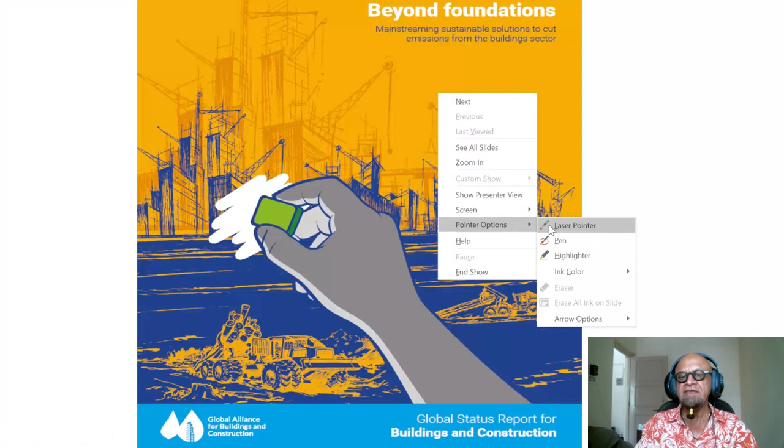Buildings and construction are among the major sectors as far as contributing to total emissions are concerned. So here are a few ideas. This is from the Global Status Report for Buildings and Construction, by the Global Alliance for Buildings and Construction: Beyond foundations, mainstreaming sustainable solutions to cut emissions from the buildings sector.

Obviously a good idea, and you have to take the ideas from wherever they come from. Just because they are profit-making companies doesn't mean they cannot put out good ideas on what they want to do to make themselves more sustainable, because everybody now has a motivation to at least appear to be environmentally friendly and sustainable. And of course there are green certification programs and so on.

The executive summary is that the buildings and construction sector contributes significantly to global climate change, accounting for about 21% of global greenhouse gas emissions. In 2022, buildings were responsible for 34% of global energy demand and 37% of energy and process-related carbon dioxide emissions. This is only expected to keep growing by 2050, as we'll see in a minute.

So policy progress is evident with more comprehensive climate action plans covering buildings and construction in nationally determined contributions. If you don't know what they are, you can follow up elsewhere. Countries that signed on to the Paris Agreement committed to contributing to global mitigation through these nationally determined contributions. However, few align with net zero operational emissions, and while over 81 countries have building energy codes, many are outdated.

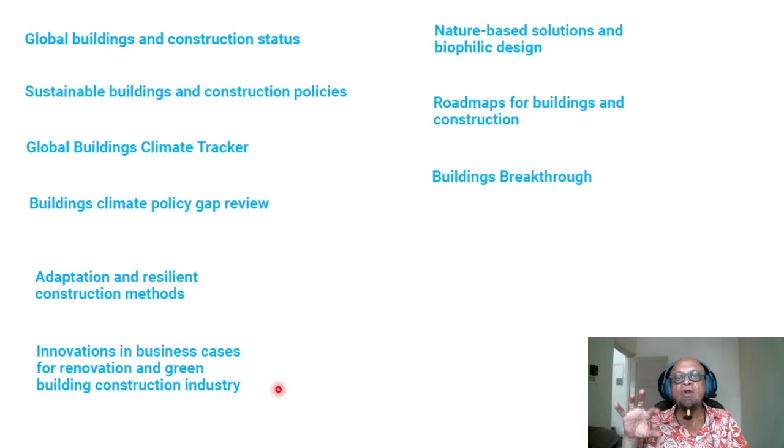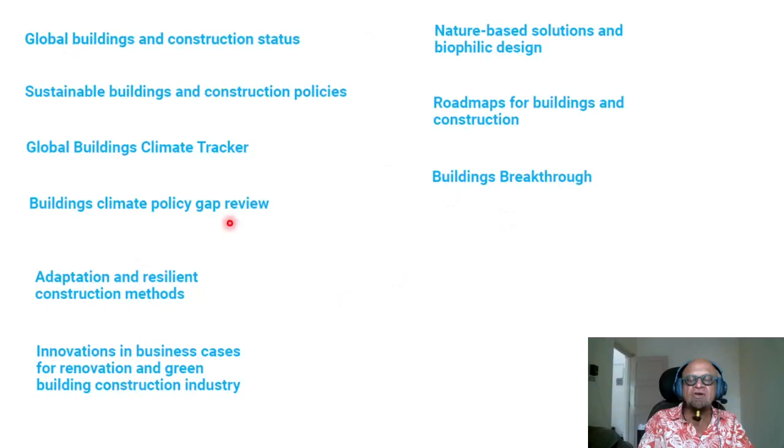Obviously, old buildings have to be retrofitted to make them more environmentally friendly, reduce their emissions, take them towards sustainability and so on. Nature-based solutions and biophilic designs are also in play, roadmaps for buildings and construction, and buildings breakthrough. I'm reading off the subsection titles because it's a long report. I'm not going to read all of it, but I'll show some key highlights.

So these are the share of buildings in total final energy consumption in 2022 and share of buildings in global energy consumption and process emissions as well. So energy demand by sector: 66% comes from other, 21% from residential, 9% from non-residential, 4% from buildings construction industry.

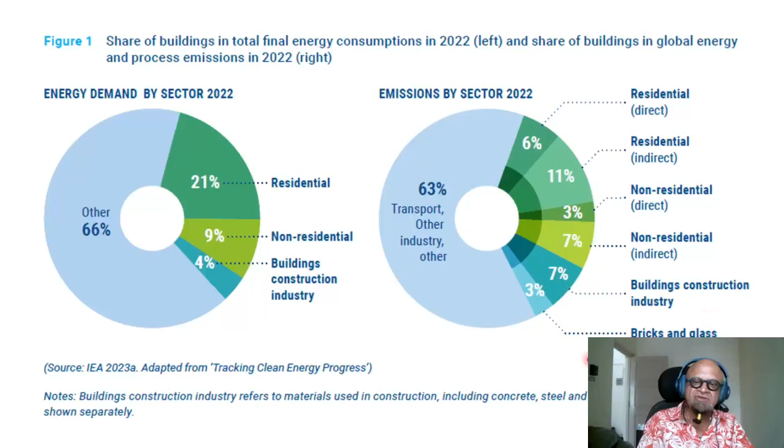And in terms of emissions by sector, if you look at transport and other industry, that's 63%. Then you have residential, direct and indirect, non-residential, direct and indirect, buildings construction, and bricks and glass. So it gives you some idea of where the levers may be in terms of reducing emissions.

The Global Buildings Climate Tracker Decarbonization Index looks at where we are and where we are headed. So on the decarbonization index, we are somewhere here, and it needs to head this way by 2050. The path to the goal is up here in terms of hitting 100% net zero for the building sector, and the gap here is 39.8 points. So they have an index that defines all these things.

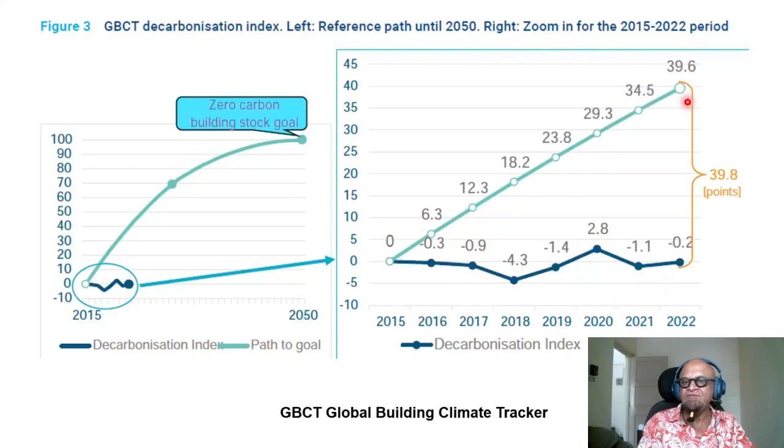I'm not going to go into that, but you can see that there is a fairly substantial gap between where we are in the last few years and where we need to be if we want to hit the goals by 2030 and 2050. So the GBCT's indicator weights, it's just something they do, and they look at 63% here for total CO2 emissions, and building sector energy intensity, renewable share in final energy demand, and so on and so forth.

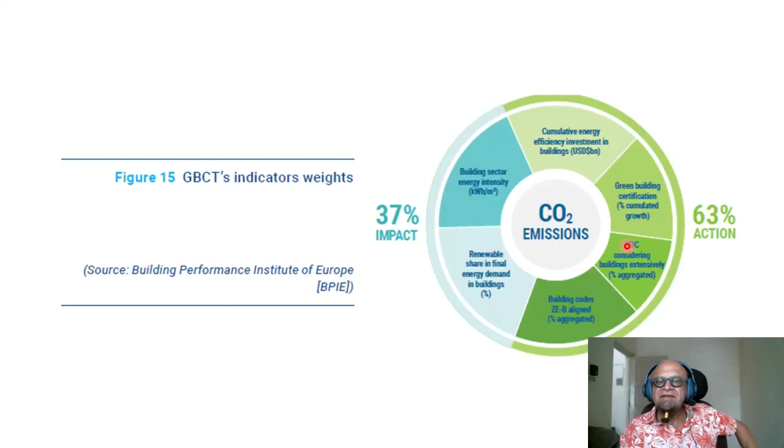You get the idea that GBCT is tracking net zero and where we are. So let's jump to recommendations for policy and decision makers. Again, not reading the whole thing, but the 2024 Global Status Report for Buildings and Construction indicates a significant lag in the sector's progress towards the Paris Agreement's net zero carbon targets by 2050. To address this, the report provides targeted recommendations. So that is split into for governments, private sector, researchers, and how these steps can help.

So for governments, the urgent need is to develop and enforce climate action roadmaps for buildings and construction, with 161 nations still pending. Private sector actors are encouraged to integrate climate action roadmaps, channel investments into energy efficient and net zero carbon buildings, and undertake retrofits to lower emissions, of course, right? How all these things will be incentivized is still tricky.

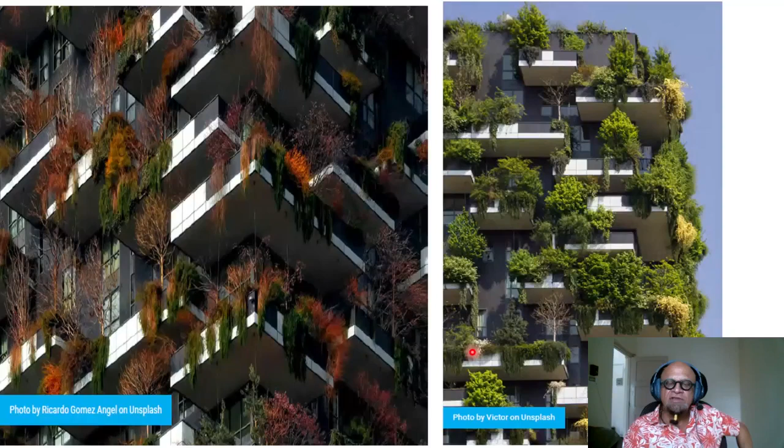Researchers and NGOs play a crucial role in supporting the creation of climate action roadmaps with evidence-based research. These steps are critical for realigning the buildings and construction sector with the global climate goals, ensuring a sustainable and resilient future. Okay, that's a good kind of a broad guideline for policies, but details will be region specific, local specific, climate specific as well.

So some nice images of the efforts at individual building levels on reducing energy use, improving air quality, and taking out CO2 with vegetation. So you can think of rooftop gardens, but also gardens literally on each balcony, and there is a lot of literature on how these are beneficial and so on.

They also do social impact assessments in this report. I'm not going to go into the details, but obviously we have Scope 0, Scope 1, Scope 2, and Scope 3 that we look at, entity and internal practices of the particular part of the sector. So here examples include ethical leadership, employee health, working conditions and satisfaction, stakeholder engagement, corporate governance, so overlapping with the ESG or the environmental, social and governance reporting that is needed.

Building users and sites under Scope 1 with housing attainability, habitability, indoor environmental. So this is social impact work, not emissions. Sorry about that. Climate change impacts and adaptation measures, and of course here you have community and surroundings, supply and value chains, and you have social impact issues and considerations across all scopes. Okay, so these also include diversity and inclusion, health, comfort and safety, privacy and security, and climate impacts.

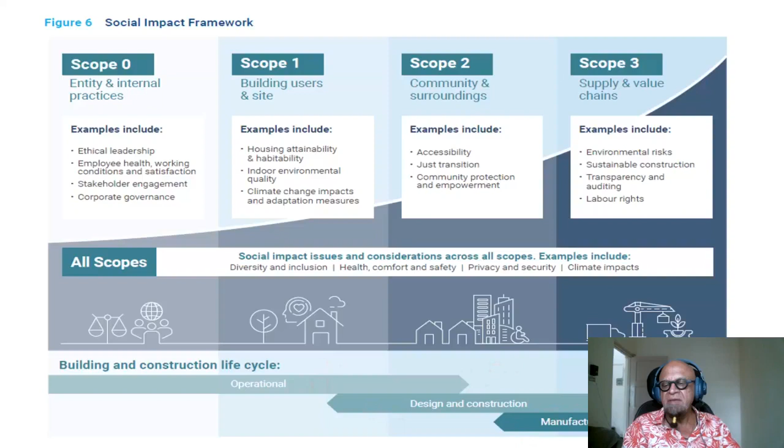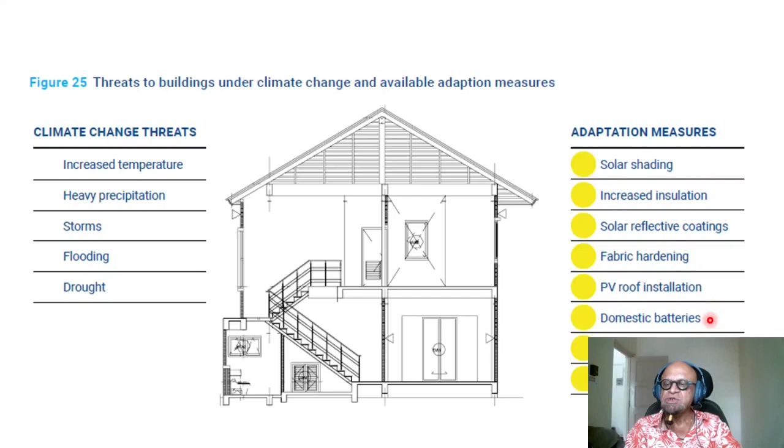Threats to buildings under climate change and available adaptation measures. Of course, you have chronic stressors like increasing temperatures and heavy precipitation, but you have acute stressors like storms, floodings and droughts. And adaptation measures, of course, include renewable energy and solar shading, increased insulation, solar reflective coating, fabric hardening, PV roof installation, domestic batteries, green facades, rain water tanks, and so on.

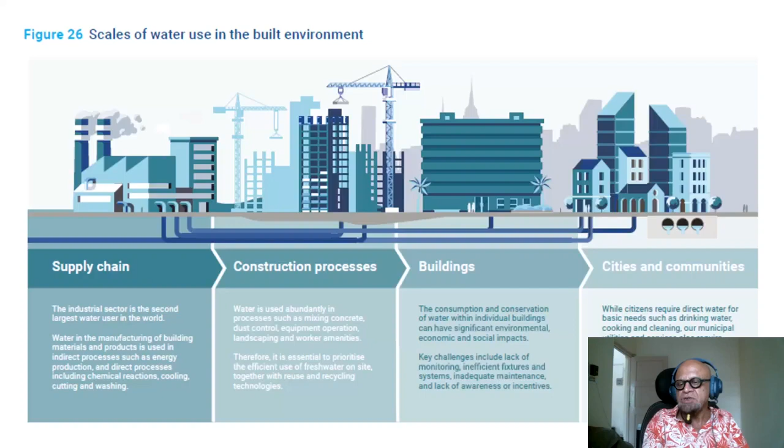Scales of water use in the built environment. You have the supply chain use, construction processes use a lot of water, buildings of course themselves will use, and in a setting, cities and communities. So while citizens require direct water for basic needs such as drinking water, cooking and cleaning, our municipal utilities and services also require fresh water. Urban centers often face problems related to insufficient infrastructure, water consumption and loss, wastewater management and water drainage. So water is an important consideration.

They suggest principles of water management for the built environment with the inverted pyramid with measures: reduce, reuse and restore water. So understand, measure, understand how much and where the water is being used so that you can manage losses and leakages.

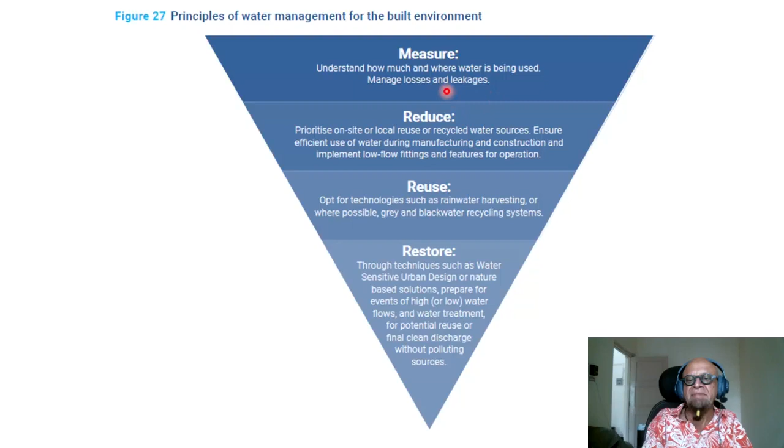And the Global ABC, that is the Global Alliance for Buildings and Construction, roadmap action framework around climate action. So on the inner circle you have zero operational carbon, zero embodied carbon, inclusion and well-being, and adaptation. So embodied carbon of course is that when you produce cement, steel, bricks, etc., and put it together, you have locked in some carbon that is emitted in manufacturing.

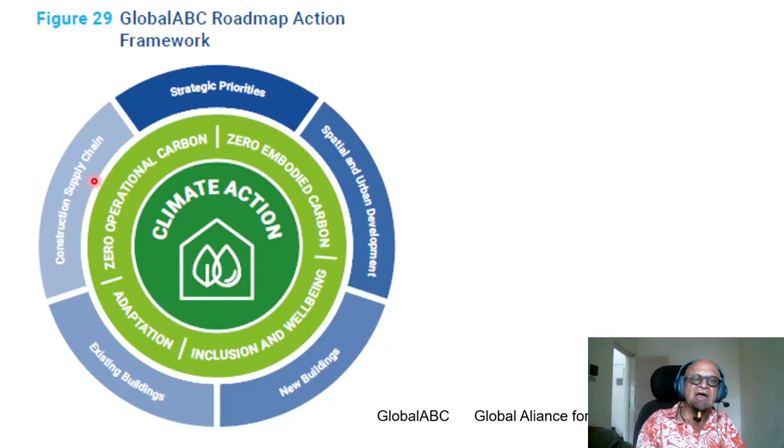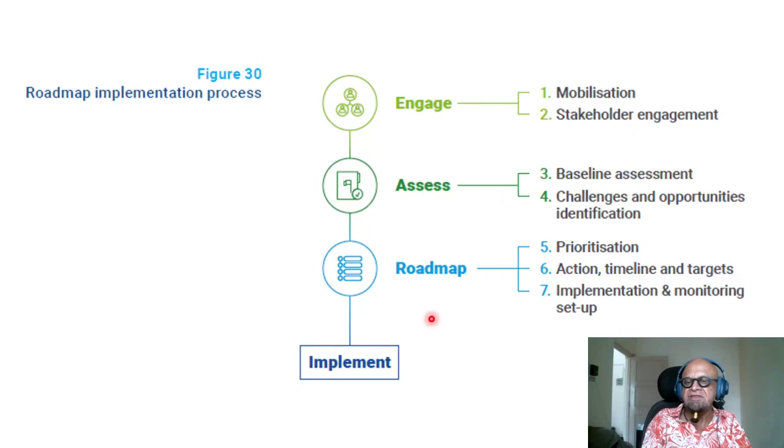So the outer layer has strategic priorities: spatial and urban development, new buildings, existing buildings, and construction supply chain. So these are the things you have to worry about in terms of making them compatible with climate action, global warming targets, net zero targets, and so on. There is a roadmap implementation process that is about engaging, assessing, and road mapping so that you can complete the implementation with mobilization, stakeholder engagement, baseline assessments, prioritizations, and timelines, targets, etc.

Okay, so I ran through it rather quickly because it is just an addition to what we have discussed in terms of materials, wooden skyscrapers. I also have podcasts on reducing emissions from cement and steel industries and so on. So this is just a complement to that. The building sector as a whole obviously is a big player in overall emissions, and it has to be mainstreamed for sustainability and reducing emissions, and these are the ways to do it. And the global tracker gives status updates that maybe I can report back in a year or two if there are significant updates. Okay, so I will leave this here.